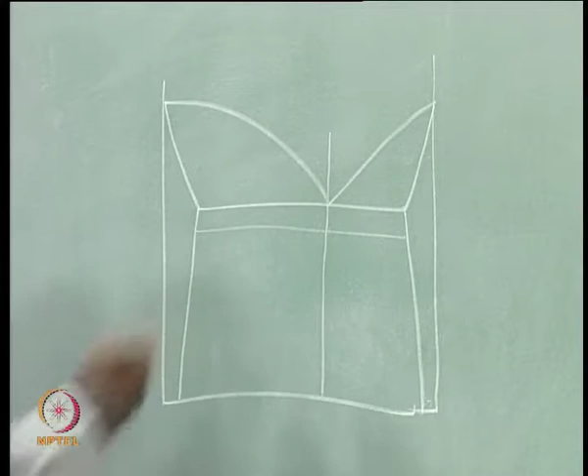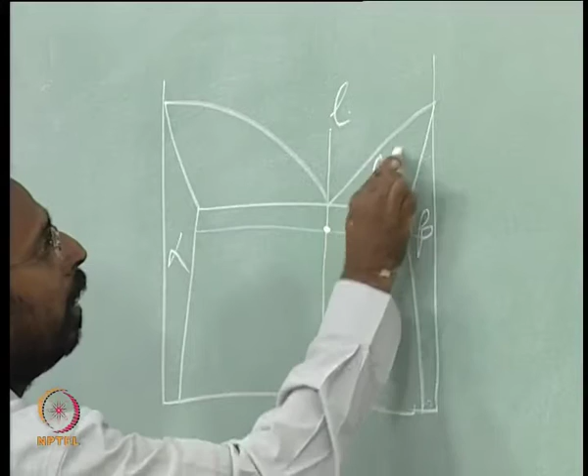For example, if you take a phase diagram like this, and you take a eutectic composition, the moment you come below the melting point, below the eutectic temperature, and hold this liquid at this temperature, what should happen? Liquid should give you alpha plus beta, and this should happen by nucleation and growth, because the liquid composition is different from the two solid compositions. So this is liquid, this is alpha, this is beta, this is liquid plus beta, this is liquid plus alpha - all this you people know.

So now if I take the liquid and bring it to a temperature T below the TE, this liquid should give you alpha plus beta, and these alpha plus beta microstructures - there are a variety of these microstructures.

The most common microstructure is what is called a lamellar microstructure. You also might have heard about what is called divorced eutectics. If possible, in today's class itself we will talk about why various types of eutectics come - that is again related to what is called surface energies, which is a part of thermodynamics. We will look at it.

But if you simply look at this alpha plus beta, which is nucleated inside a reservoir of liquid - so you have a liquid here, and this nucleus, a couple which has nucleated - alpha and beta always nucleate together if it is a lamellar eutectic. If it is not a lamellar eutectic, they will not nucleate together, which we will also see later. But assuming that they nucleate together, how do they grow?

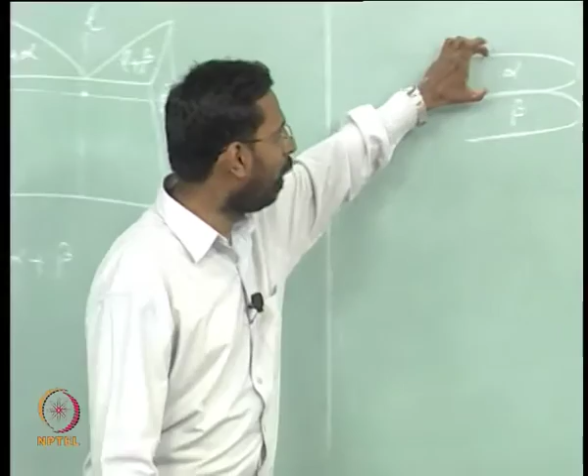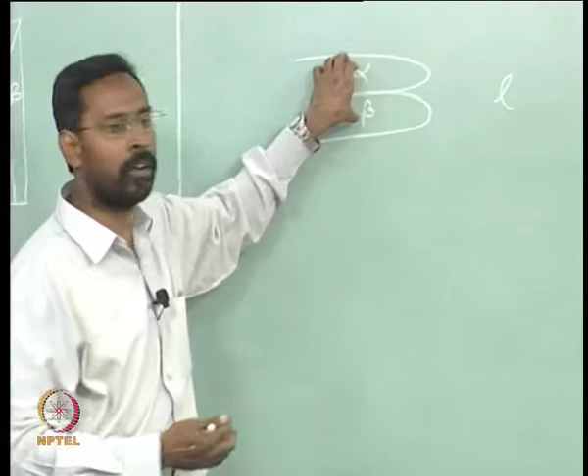If they want to grow, what you see is that alpha is an A-rich phase, beta is a B-rich phase. So an A-rich phase and a B-rich phase, both of them are growing together into the liquid. How do these two grow? They can grow only when the liquid supplies atoms to alpha and beta. Atoms are actually coming from the liquid to alpha and beta, joining them, and as a result the alpha and beta are growing together at the expense of the liquid.

So at the end of the reaction, if I do what is called the cooling curve - temperature versus time - at this particular time this has nucleated, and as it grows, by this time all the liquid should vanish and everything should become alpha plus beta. Of course there are a number of such couples that nucleate at various positions, a number of nuclei, and all of them grow together such that they form what are called certain boundaries.

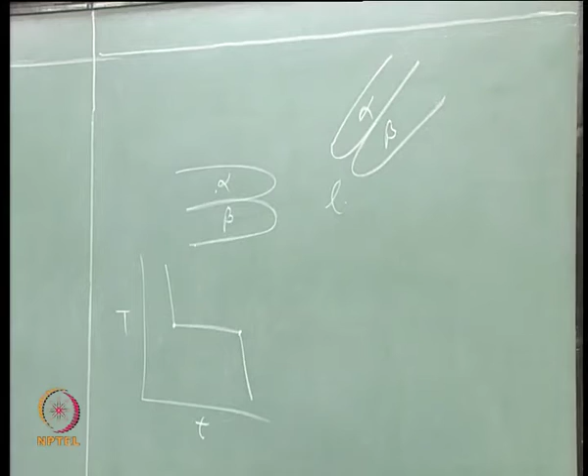What do we call those boundaries? They are not grain boundaries. In a eutectic you do not call them grain boundaries, because a grain boundary is related to one single phase, and there is no single phase here. So what do you call it when the eutectic nucleates here and something else nucleates somewhere else - alpha plus beta, both of them come together and meet each other - what do you call that boundary? Of course, it is an interface. Even this is also an interface.

So there is a name - this is called a eutectic colony, and what you get are called colony boundaries, eutectic colony boundaries. So you have a number of such eutectic colonies growing, and you will have eutectic colony boundaries coming in like grain boundaries. They are analogous to grain boundaries, and you would see in most such eutectic microstructures, boundaries of different alpha-beta growing in different orientations.

Between each colony, the difference is the orientation of the alpha-beta couple. So the alpha-beta couple orientation in this colony and that colony is going to be different. It's similar to a grain boundary, where grain orientations differ at the boundary. But let's forget about that for now.

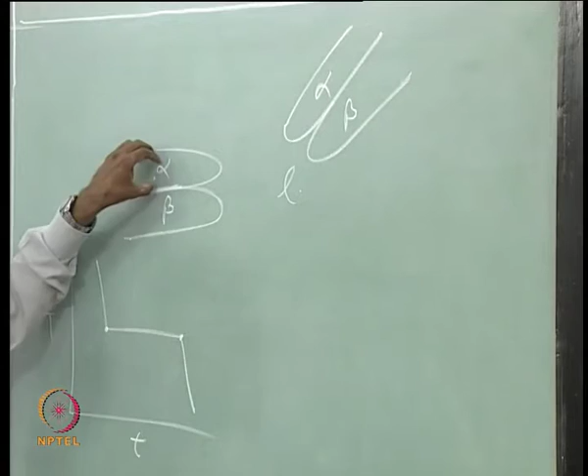Basically, alpha and beta grow at the expense of the liquid. That means for alpha and beta to grow together, the liquid needs to supply more A atoms to alpha and more B atoms to beta. This is a very tricky problem. How is it that the liquid in front is selectively able to supply more A atoms to alpha and more B atoms to beta, such that they grow together?

It is one single liquid. One single liquid is able to supply more A atoms to alpha and more B atoms to beta. Unless you do that—if only certain atoms, let's say A atoms, are coming uniformly to both—only alpha will grow, beta will not grow, and then it will not be a coupled growth. So for coupled growth to happen, selective supply of atoms to alpha and beta should take place. And how does this happen? It happens if you understand the thermodynamics a little bit.

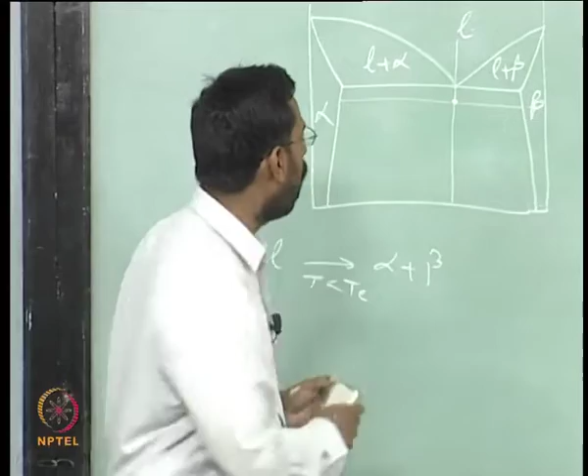Let's try to see what happens when we draw a free energy composition diagram at a temperature like this. I have taken a liquid of eutectic composition and brought it to this particular temperature. At that temperature, this whole thing is happening, and I am trying to look at what is happening. So if I draw the free energy composition diagram at that temperature, how will it look?

What is stable at that temperature? Alpha plus beta. That means the alpha and beta free energy curves should be below that of the liquid. By now this should be clear to you. So if that is the case, I can easily draw a liquid curve, an alpha curve, and a beta curve, and draw a common tangent between them. So this is the alpha curve, this is the beta curve, this is the liquid curve, clear?

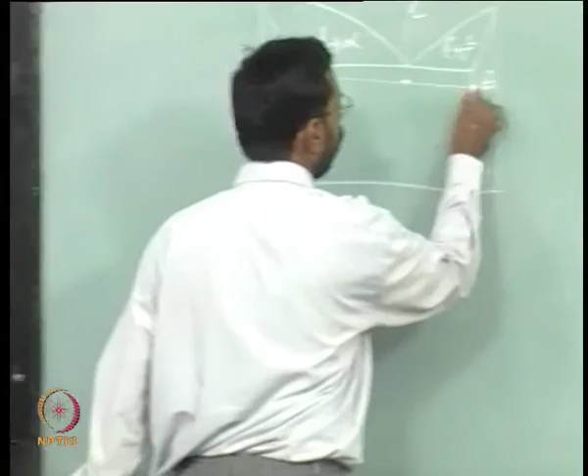These two compositions where you have the common tangent of alpha and beta should correspond to these two compositions in our phase diagram, am I right? Because there has to be a one-to-one correspondence between the free energy composition diagram and the phase diagram. This is the G-X diagram, the free energy composition diagram.

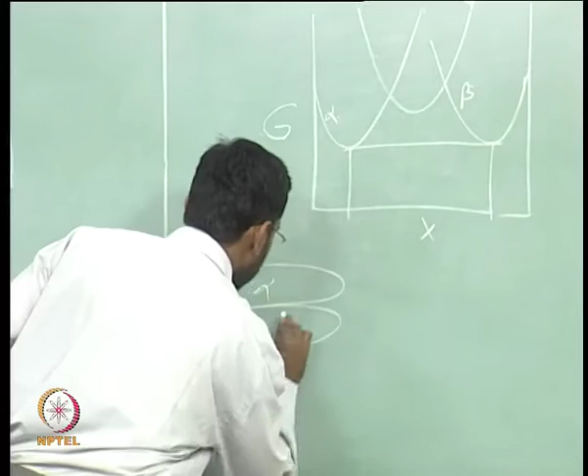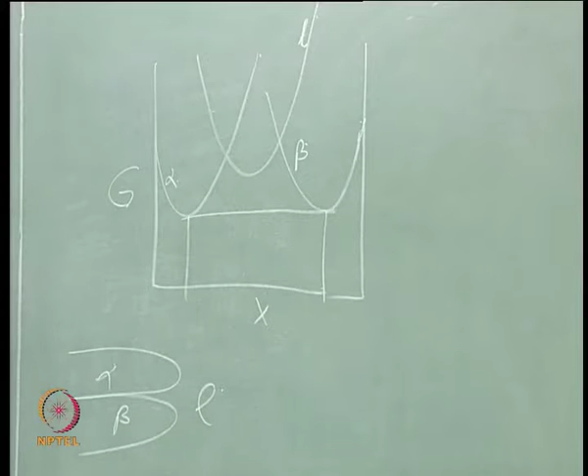Now if I look again at our couple—alpha and beta—you have liquid here. So this alpha is in equilibrium with liquid, and this beta is also in equilibrium with liquid. Now let's look at what in this free energy composition diagram represents the equilibrium between alpha and liquid, and between beta and liquid. Whenever I say equilibrium, it is represented by what? In a diagram, it's a common tangent. So when I say equilibrium between alpha and liquid, I should draw a common tangent between alpha and liquid.

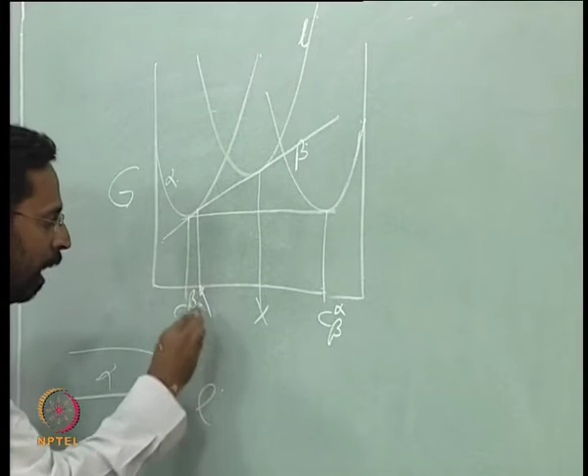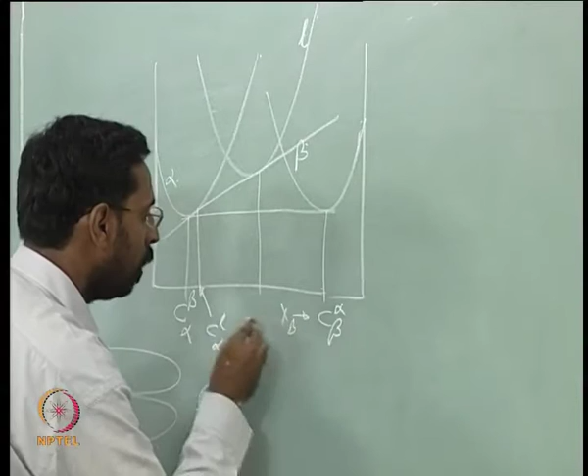So how do I draw a common tangent between alpha and liquid? Something like this. So you have this composition and this composition—let's first give notation for the first two compositions we already drew. What is this? This is the composition of alpha in equilibrium with beta. This is the composition of beta in equilibrium with alpha. And what is this composition now? This is C alpha-liquid, and this is C liquid-alpha.

Now let's do the same thing for beta. If I do this, we get two more compositions—so in total we get six compositions now. This composition, if I put it, is C liquid-beta, and if I identify this composition, this is C beta-liquid.

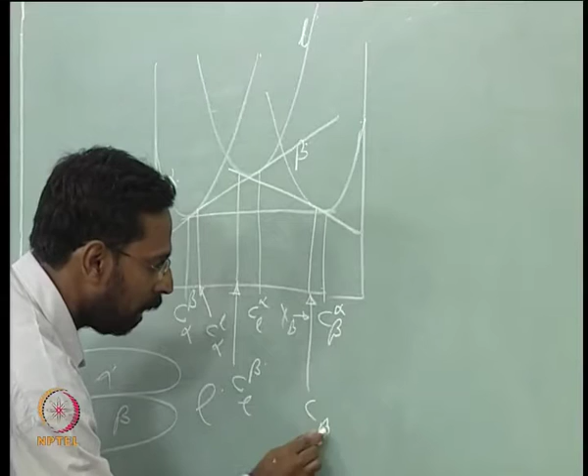What am I getting out of all this? Just simply six compositions, but if I carefully observe these six compositions—forgetting about the first two between alpha and beta—look at these four compositions. If I compare the composition of liquid in equilibrium with alpha and the composition of liquid in equilibrium with beta, I get some information. What is the composition of liquid in equilibrium with alpha?

It is this. This is the composition of liquid in equilibrium with alpha. This is the composition of liquid in equilibrium with beta. What does that tell you? That tells you the liquid in equilibrium with alpha has a higher B content compared to the liquid in equilibrium with beta. That means the liquid just in front of the alpha and the liquid just in front of the beta, if I look at the compositions of those two liquids, they are not the same.

Not only are they not the same, but the common tangent construction itself makes it such that the composition of liquid in equilibrium with alpha has more B content than the composition of liquid in equilibrium with beta. This quantity is higher than that quantity in terms of percentage B. That means just in front of alpha you have more B atoms, and in front of beta you have more A atoms.

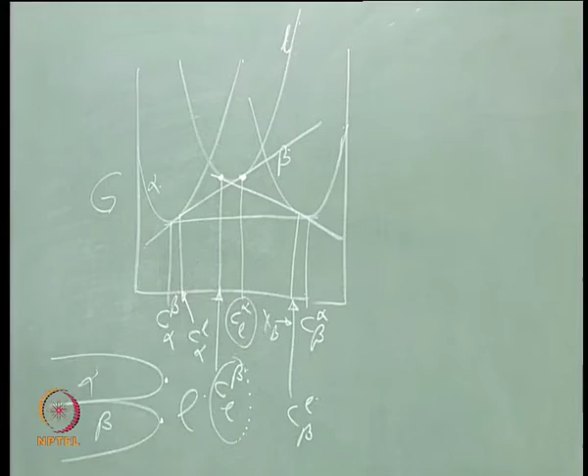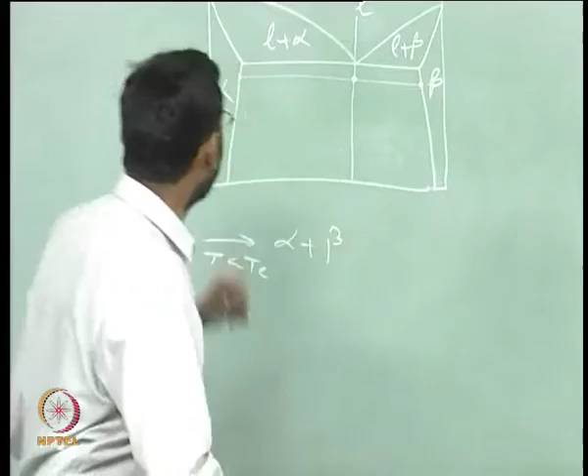This means that liquid is not having the same composition everywhere. If I go far away from this alpha-beta interface, what is the composition of the liquid? It is same as that of the eutectic composition. It is only because of the local equilibrium that has to be maintained for this alpha, and if this composition is not maintained, then alpha and beta cannot exist in equilibrium with liquid. They will possibly dissolve back into the liquid.

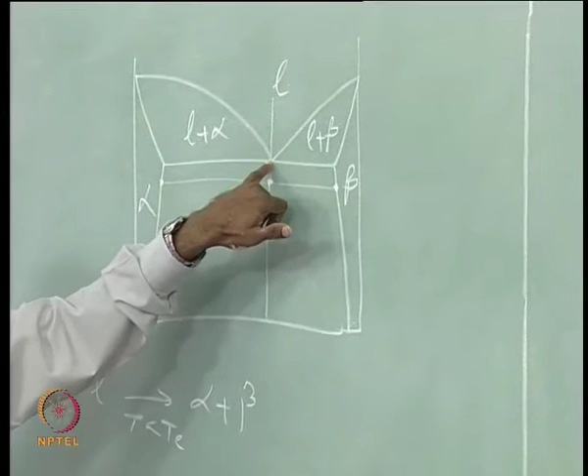If alpha and beta have to exist with the liquid, the only way that is possible at this temperature we are talking about. Remember, if I am talking of at this temperature, the situation would be different—at the eutectic temperature it is the same because it is a common tangent between all three. But we are talking of a temperature below the eutectic. I have brought the liquid below the eutectic and now looking at what would happen.

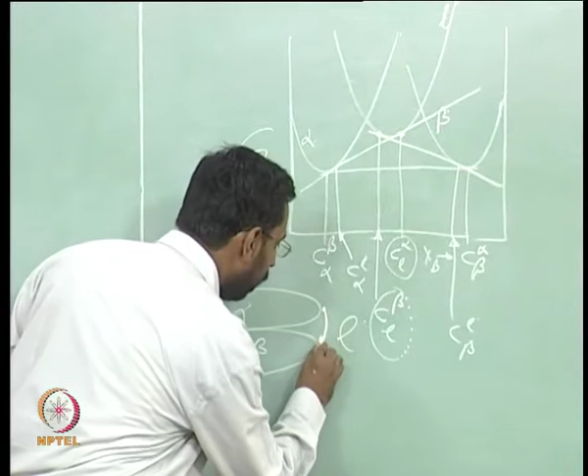If I am looking at that, you would see because of this, here at this position you have more B atoms than this. Then what you see is that B atoms will start travelling in this direction and A atoms will start travelling in this direction.

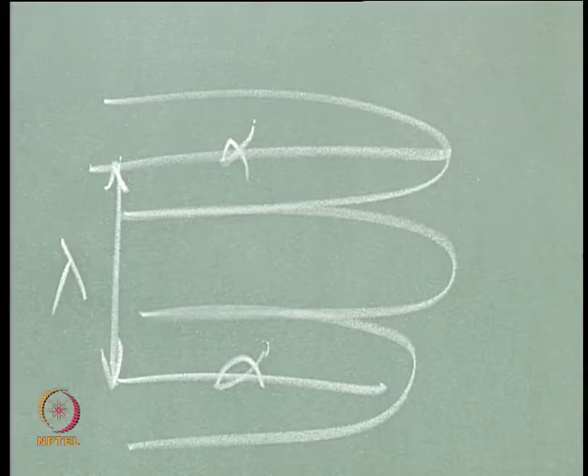And the gradient is decided by what is called the interlamellar distance. This distance between half of the alpha and half of the beta—between the center of the alpha lamellae and the center of the beta lamellae—is related to the interlamellar distance in a eutectic. So when I say if I have an alpha here, beta here, another alpha here, this to this is the interlamellar distance, lambda. So basically this is lambda by 2 we are talking about.

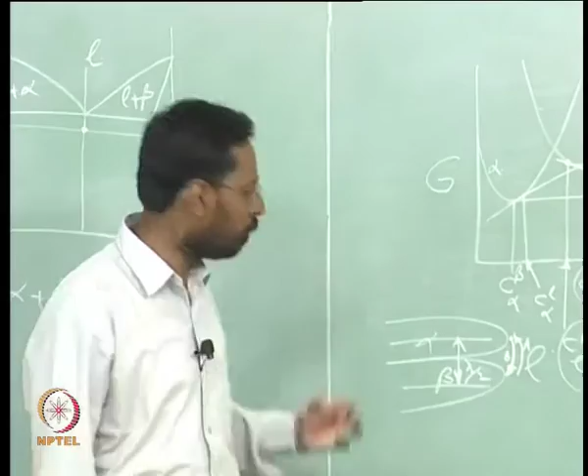This movement of atoms—B atoms going towards the beta and A atoms going towards the alpha—will make sure that the alpha gets more A atoms and the beta gets more B atoms, so that both of them grow together. And this is driven by the difference between the composition of this and this, which is what we call delta C, which is nothing but C liquid alpha minus C liquid beta.

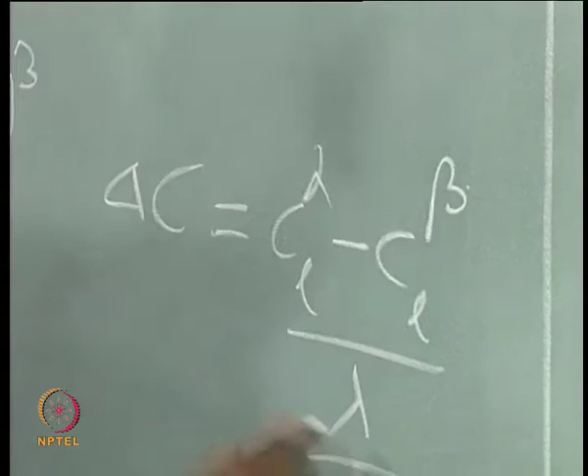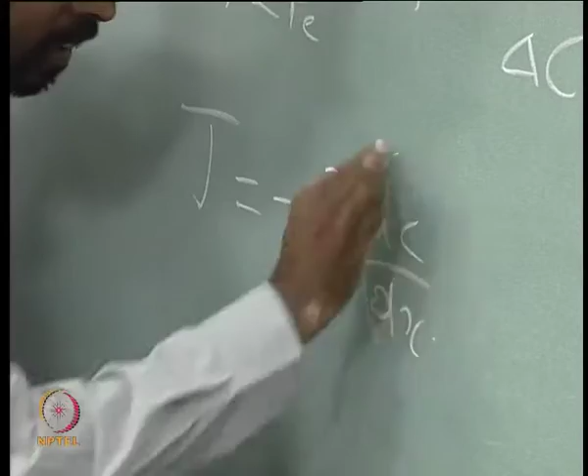This, and the concentration gradient, can be written as delta C divided by lambda by 2. This is the actual concentration gradient, and if you say diffusion flux J is minus D times dC by dx, the dC by dx for the flow of atoms comes from here. Once the nucleation has taken place, the growth is decided only by diffusion, and diffusion needs a gradient. If there is no gradient, if the gradient is zero, there is no diffusion. So this gradient is provided by this.

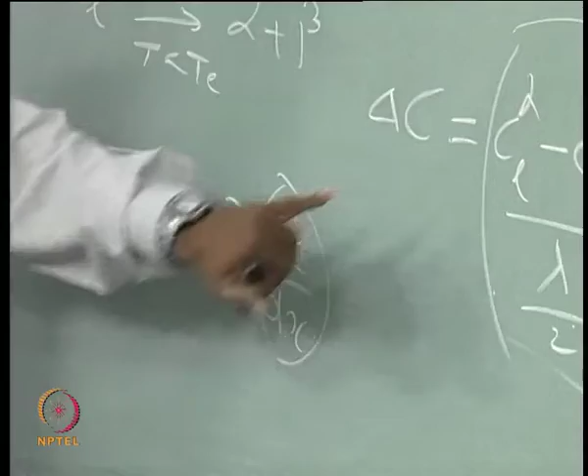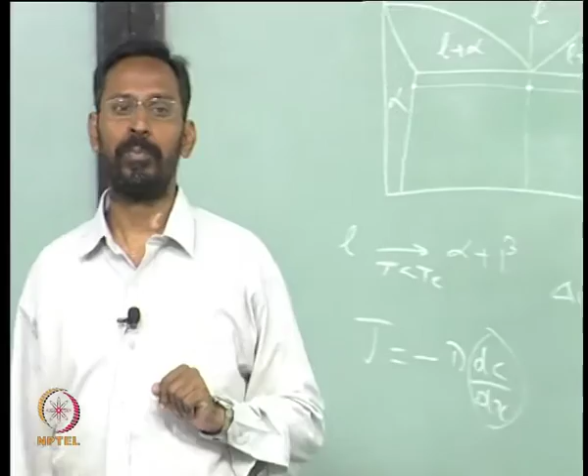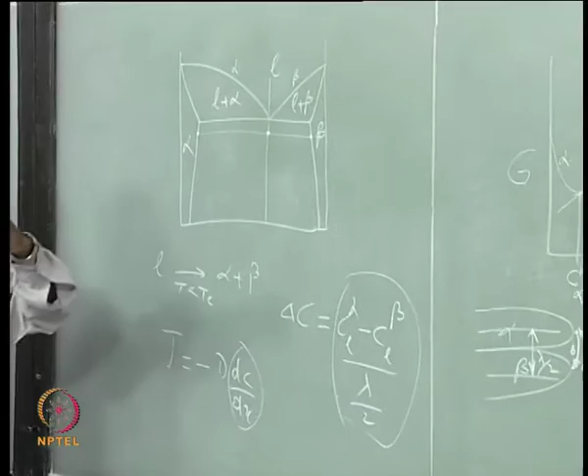And how do I see this in the phase diagram? Can I see these two points in the phase diagram? Now C liquid alpha and C liquid beta, where are they in the phase diagram? You have two liquidus lines here, one is called the alpha liquidus, another is called the beta liquidus. The alpha liquidus tells you at all temperatures what is the composition of liquid in equilibrium with alpha, and the beta liquidus tells you the composition of liquid in equilibrium with beta at various temperatures.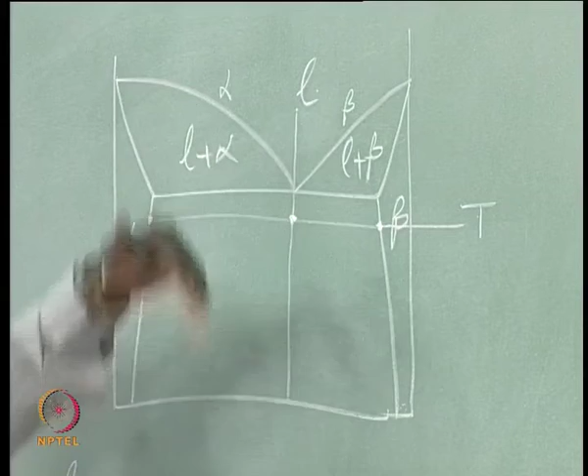So I want to know at this temperature T, what is that composition of liquid in equilibrium with alpha and liquid in equilibrium with beta. The only way I can find out is by extrapolating the two liquidus lines. So if I extrapolate the two liquidus, I get this, and this composition is nothing but Cl alpha. This is nothing but Cl beta.

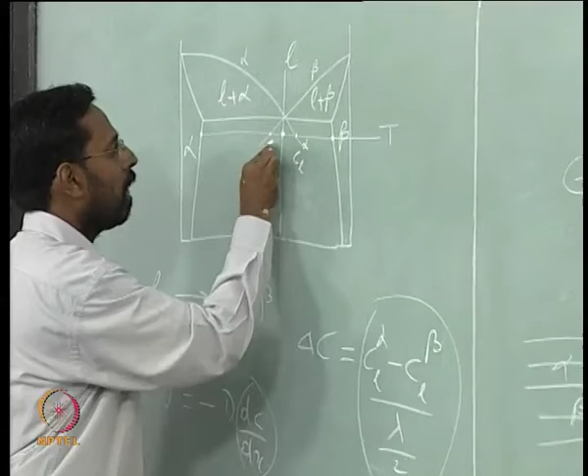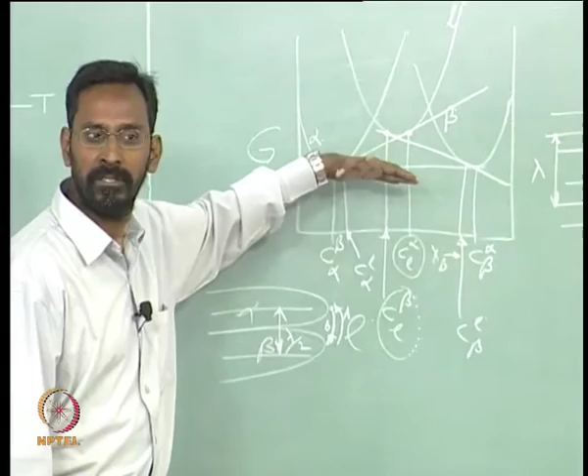The difference between these 2 is actually the driving force for the growth of eutectic. If you want the eutectic to grow, that is the reason why, if you carefully observe, at the eutectic temperature this difference is 0. Cl alpha is equal to Cl beta, because at the eutectic it is actually a common tangent, isn't it? If you remember, I can draw it for you once again.

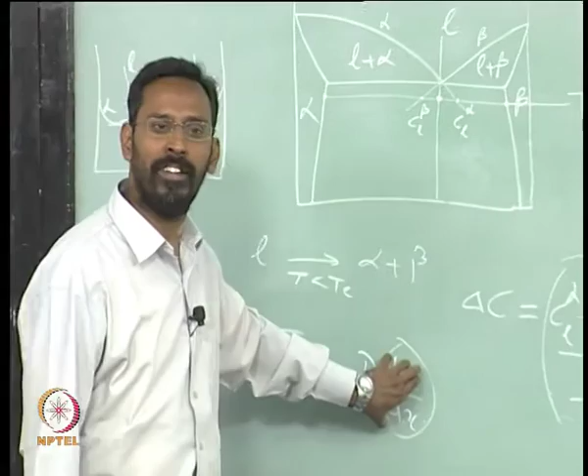So this is alpha, this is liquid, this is alpha, and this is beta, let us say liquid alpha beta. If I am trying to look at what is the composition of liquid in equilibrium with alpha, and what is the composition of liquid in equilibrium with beta, they are the same at the eutectic. Once they are the same, this delta C is 0, and if delta C is 0, the gradient is 0.

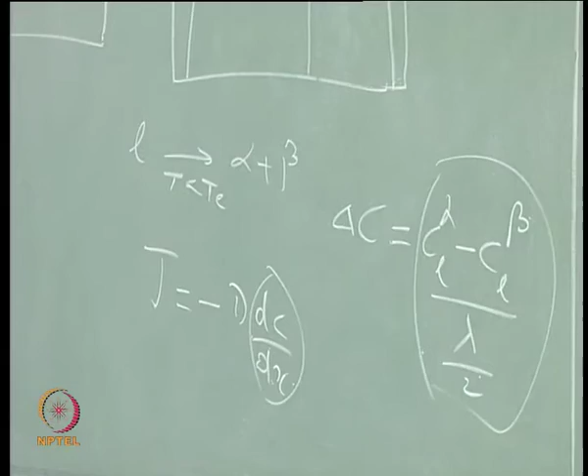If the gradient is 0, the flux is 0. So in principle, at the eutectic you cannot have growth, you need a small undercooling, at least a small undercooling. It can be very small if there is heterogeneous nucleation available, otherwise it can be slightly large, but you need a small undercooling so that you have a driving force.

And that is why you can again see that if I extrapolate this to lower temperatures, the lower the temperature, the larger the delta C, am I right? And that means the larger the gradient, and as a result, in principle, you can see the growth rate has to be higher. But there is a catch here. What is the catch?

The catch is the D there, the catch is the D. So we are forgetting that there is a D there also, and this D incidentally, if you carefully look at these 2 curves...

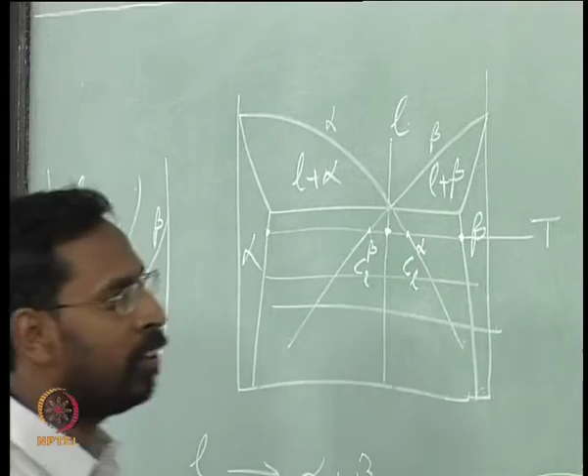If I assume that these are linear, then I can assume that the delta C is linearly dependent on the temperature, isn't it? Because this difference can linearly increase with temperature if these 2 are linear. If these 2 are straight lines, not curved lines, then you will see if I plot delta C versus delta T, delta T is undercooling, I will see that this will be linear, and at delta T being 0, delta C has to be 0.

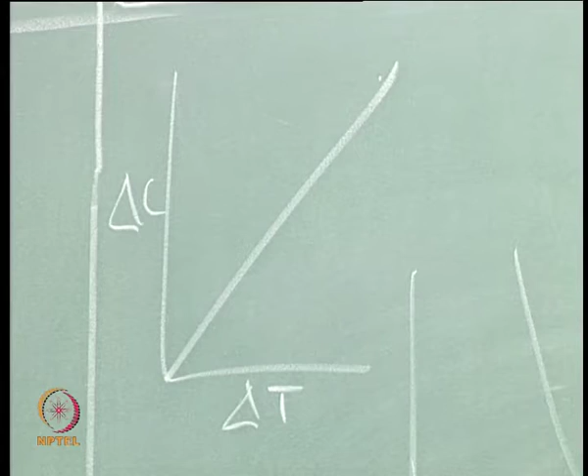Now, if I find out the D as a function of undercooling, if I look at the D, how does it change? How does the diffusivity change with temperature? It decreases, of course. In what fashion?

Exponential. Be confident whatever you want to say, you are an IITian. Tell me, how does diffusivity change with temperature? That is what we are questioning. All of you have read from your BTech level at various stages how diffusivity changes with temperature. There is a particular expression which we always use, what is that expression called?

It is an Arrhenius equation. Okay, fine. So this tells you that D is exponentially related to T. You can see that D is D naught exponential minus Q by RT.

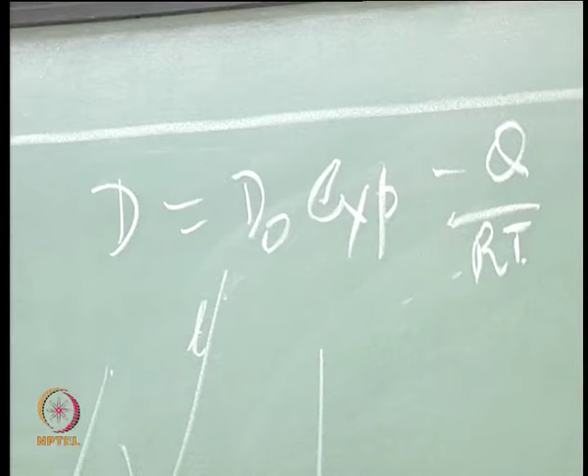So you will see that the actual, if I plot D on the same plot, you would see D would decrease. I have actually drawn it parabolic, but it is not actually parabolic, it is exponential. So it decreases very rapidly as you increase the delta T, or decrease the temperature. Increasing delta T basically means decreasing the temperature, so our delta T is increasing in this direction. So that means there is a particular critical temperature, beyond which you will see the diffusivity plays a major role.

So, that is where you will see - in fact we are not really talking about kinetics here, otherwise I could even talk about the whole growth rate and how it changes. In fact, lambda itself changes as a function of temperature. You cannot have the same lambda at different temperatures. All these things, when you study any kinetics course, you will know more about it.

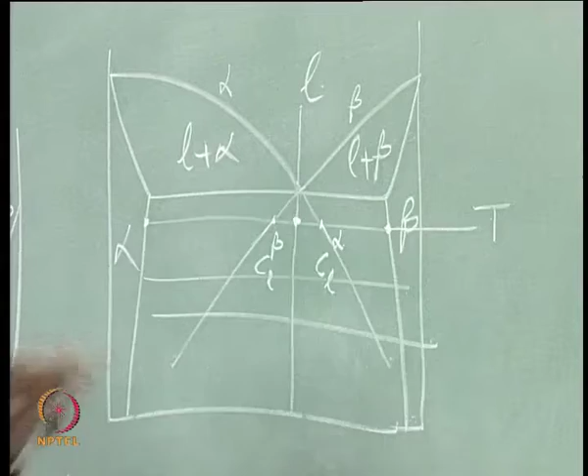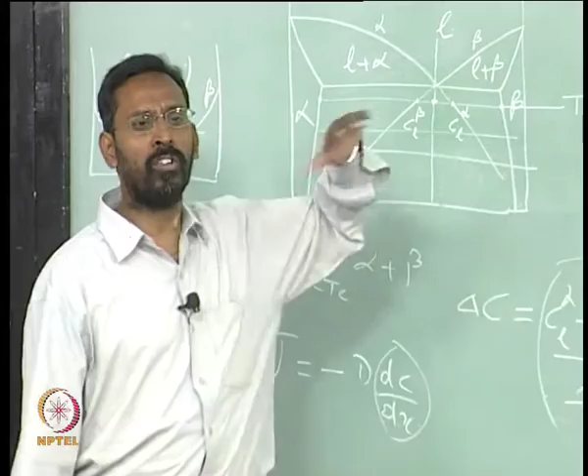So, you can see until a certain temperature, growth rate is always proportional to the undercooling, because the undercooling decides the delta C, and the delta C decides the dC by dx. As a result, at temperatures closer to the eutectic temperature, the growth rate is always decided by the delta T undercooling. So, the higher the undercooling, the better.

That is the reason why for any eutectic mixture, if I pour the liquid metal into a metallic mold or a sand mold, you would see the growth rates are different. In fact, not only growth rates, the lambda is also different - you will get a finer lambda, basically because the nucleation rate is higher, so R star is smaller. So all those things become important.

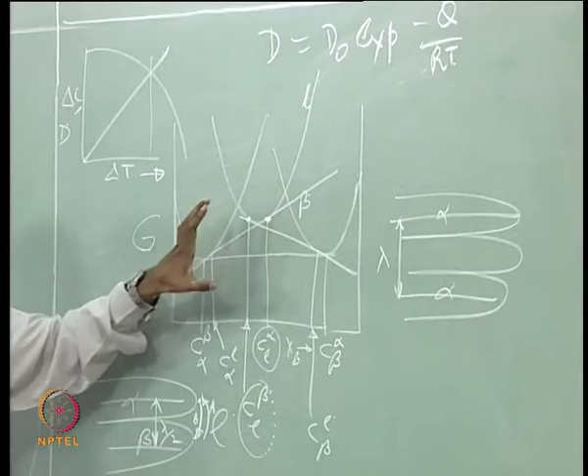So, you can see that this problem of how liquid is able to supply atoms to alpha and beta, we are able to simply understand just from this diagram. From thermodynamics very easily we can explain how this comes about. Now, let us go to the second concept.

What should be the nature of the eutectic? It does not always give you a lamellar eutectic. Can you tell me what is the type of eutectic in a steel, in a cast iron? Sorry, I should not say steels - you do not have eutectic in steels.

In fact, that is what differentiates steels and cast irons. Have you ever known what is the difference between a steel and a cast iron? When do you call an iron carbon alloy as steel? When do you call it a cast iron? Less than 2%. Why? What is so sacrosanct about this 2%?

Because I am not entering into the eutectic region. Yes, the cast irons - that name suggests they are easily castable, and easy castability is basically related to the eutectic.

So, cast irons are all those where you have a eutectic reaction, and in the phase diagram, below 2% there is no eutectic reaction, isn't it? Remember the iron carbon diagram, the iron cementite diagram - you would see that it is only beyond 2% you start seeing the eutectic reaction. That is the reason why we call beyond 2% cast iron. It is not just a magic number; it is basically decided by the phase diagram - wherever the eutectic reaction starts, we call them cast irons, below that we call them steels.

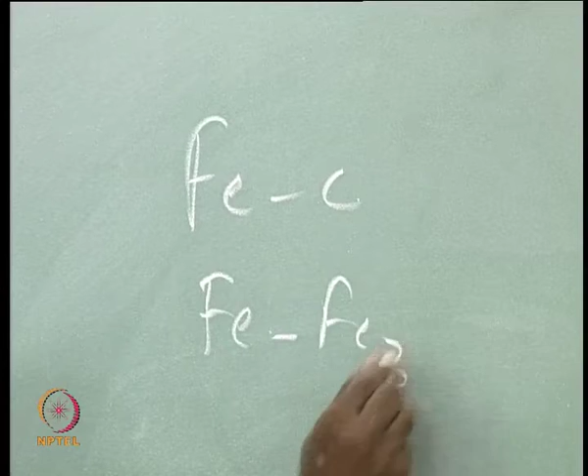So, coming back to that - this also reminds me that we should try to understand why an iron carbon diagram and an iron cementite diagram are different. Today we will try to understand that also. Before that, we will try to see there are different types of eutectics, as we said.

For example, coming back to our first question - in the iron carbon cast irons, what is the type of eutectic you have? Lamellar. You people have not seen microstructures - you have what is called a second year physical metallurgy lab, many of you BTechs should have. What is the eutectic if I take a white cast iron? White cast iron is a typical cast iron.

The other cast irons where you get graphite - that is not actually decided by the iron carbon, it is graphite which comes from the iron carbon, whereas in the iron cementite diagram, the actual eutectic reaction is liquid giving gamma plus Fe3C - that is the eutectic. Where do you see that eutectic? You see it only in white cast iron, not in any other cast iron - whether grey cast iron or nodular cast iron, you see graphite there, which is not a gamma plus cementite eutectic. Gamma plus cementite eutectic, called ledeburite, is seen only in white cast iron.

So what is the morphology of this gamma plus cementite? Is it lamellar? It is not lamellar - you have cementite networks. You have all seen microstructures of ledeburite. I am not asking about the cementite network you see when cementite is precipitated from austenite.

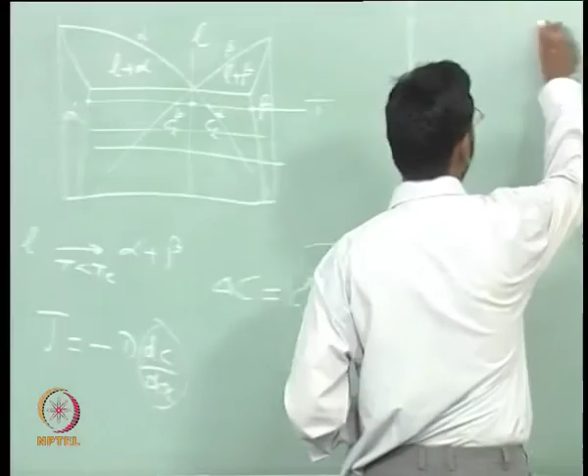Can you tell me which eutectic has actually a lamellar structure? Now, I have given two examples of non-lamellar eutectics. Give me any one example of a lamellar eutectic that you know. It is not eutectic, madam, you are talking of eutectoid, I am asking eutectic. Which eutectic is lamellar? You have never come across one? All of you are metallurgists, at least many of you, majority of you. Aluminum copper is one, lead tin is another, these are all lamellar eutectics.

If you take aluminum silicon and iron carbon, these eutectics are non-lamellar, and people call them divorced eutectics. Divorced, in the sense they are not together, the alpha and beta are not together, they are kind of separate.

Why does that happen? To understand this, we need to understand the interfacial energies. Whenever I talk about alpha, beta and liquid, I have 3 interfaces. Am I right? What are the 3 interfaces? Liquid to alpha, liquid to beta, and alpha to beta.

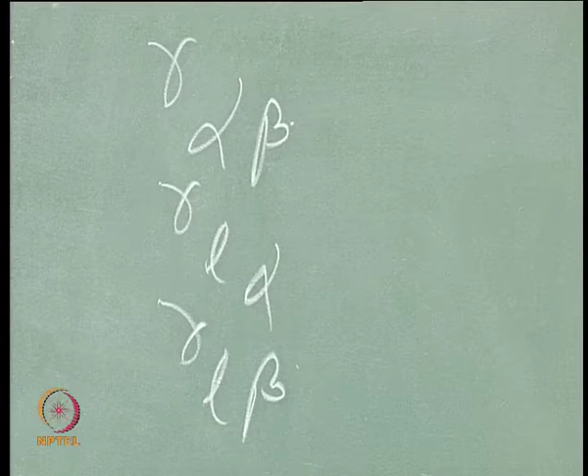So if you look at these 3 interfaces - alpha beta interface, liquid alpha interface, liquid beta interface - all of them are associated with certain interfacial energies. There is an alpha beta interfacial energy, a liquid alpha interfacial energy, and a liquid beta interfacial energy. We have already seen that whenever you talk about a liquid to solid transformation, the barrier for the transformation is always the interfacial energy.

Whenever I bring a liquid below the melting point, it wants to become a solid, because there is a driving force in terms of the volume free energy. The liquid has a higher free energy than the solid below the melting point, as a result solid wants to form, but why solid does not form is because of the interfacial energy. So whenever you have this kind of 3 interfaces, the system would choose the one which has the lowest interfacial energy.

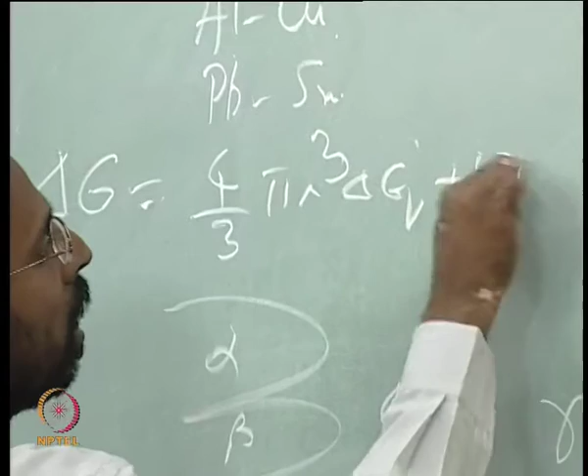If a particular system has alpha beta interfacial energy as the lowest, the system would like to have that particular interface maximized, so that the overall interfacial energy is A into gamma. This is what is actually preventing the transformation - that is why if you remember delta G, we always write 4/3 pi r cube delta GV plus 4 pi r square gamma, you remember this.

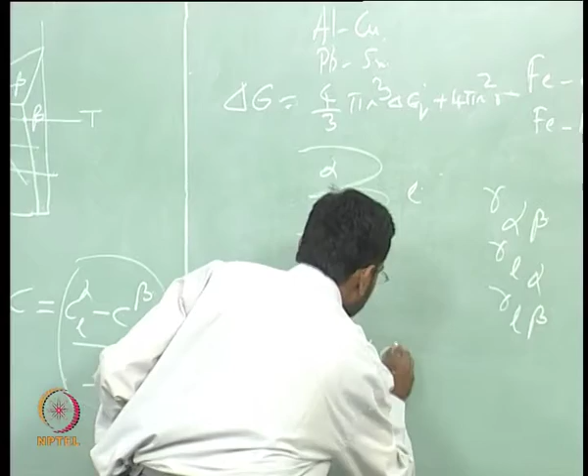Of course, there we have assumed a spherical nucleus, we are not talking about eutectics there, but if you talk about eutectics, the same thing holds good, except that these geometric factors will change. Basically I can write delta G as V into delta GV plus A into gamma, am I right? So it is this A into gamma that needs to be minimized, so that even at a smaller undercooling the liquid can become a solid.

The liquid wants to become a solid at as small an undercooling as possible. So it will choose - for example, if it is a pure metal solidifying, it has no choices of interfacial energies, there is one single solid nucleating out of that. There also it will search for any heterogeneous nucleating sites. The moment there are heterogeneous nucleating sites, the liquid is very happy, because this gamma is very small there.

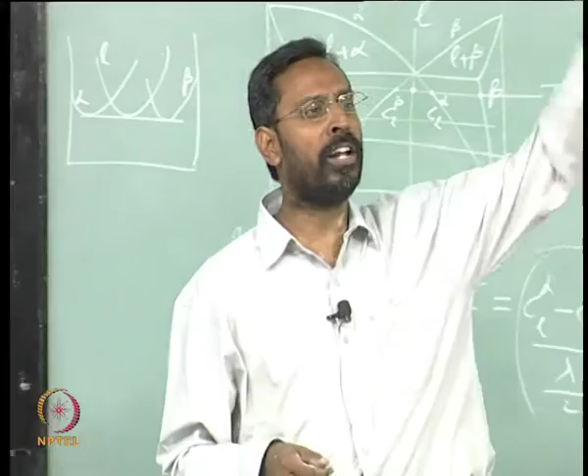Because that is the meaning of a heterogeneous nucleation site - a site where the interfacial energy between the solid that is nucleating and the particle that is available is very small, and that is the reason why you see heterogeneous nucleation occurring. If you just add any type of particle to a liquid, it does not give you heterogeneous nucleation. Simply take aluminum, add some sand particles to it, it does not give you that, though you may say there are particles available. That particle you are adding should have a structural compatibility with the solid that is nucleating, such that the interfacial energy between the solid and the particle available should be very small, so that this is minimized.

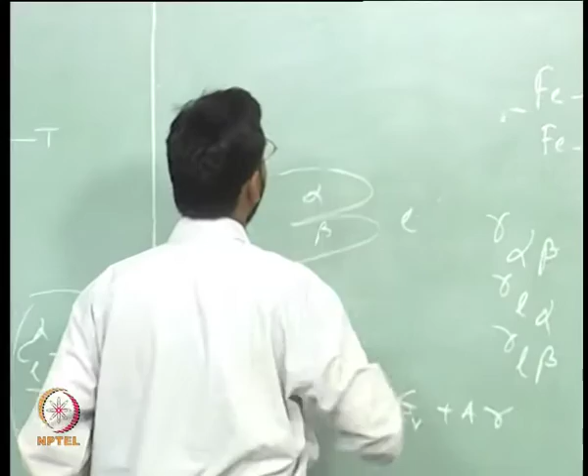Going back to heterogeneous nucleation, think of a particle here with a solid nucleating in a liquid. Before solidification has taken place, if the solid has not formed, what you have is only a particle-liquid interface. You have a particle, you have a liquid, and the solid has not formed on it, so you have a gamma PL.

Before a solid has formed on it, this gamma PL has some surface area, and that area into gamma PL will decide what is the total interfacial energy of that particular system, given there is a particle inside a liquid.

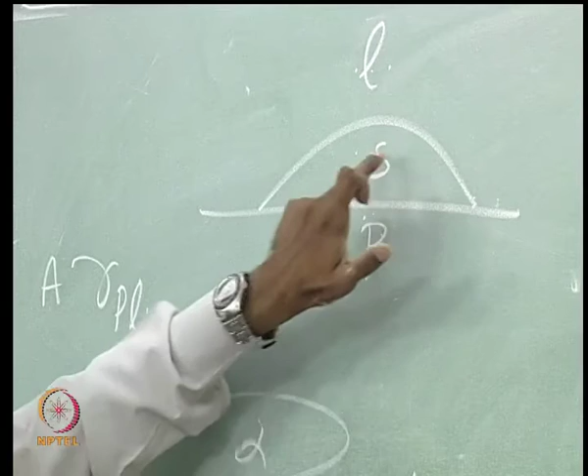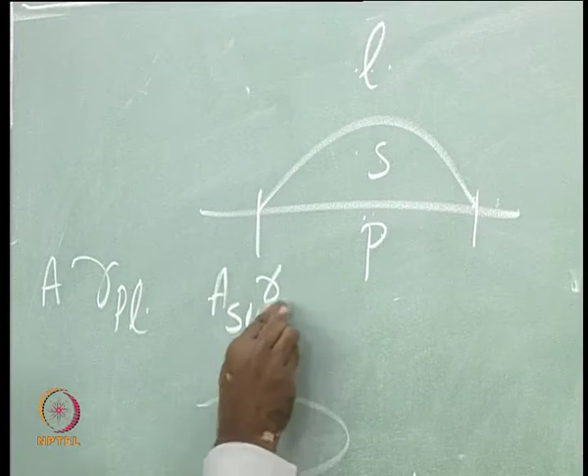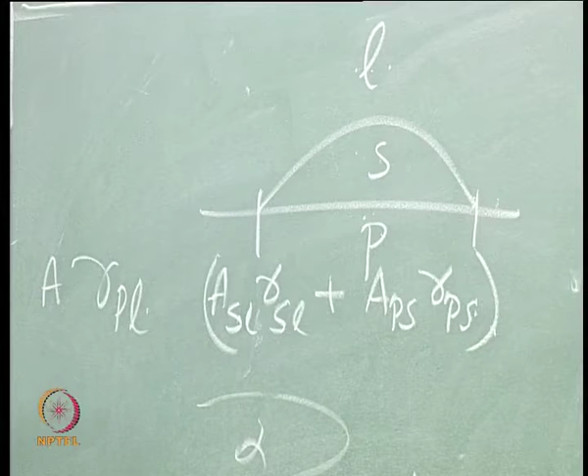Now, the moment a solid nucleates on the particle, you have different interfaces: a particle-solid interface and a solid-liquid interface. So a particle-liquid interface, which was in this area, has now been replaced with a particle-solid interface and a solid-liquid interface. So you will have A of SL into gamma of SL, plus A of PS into gamma of PS. These two are replacing A of PL into gamma of PL. If this is smaller than this...

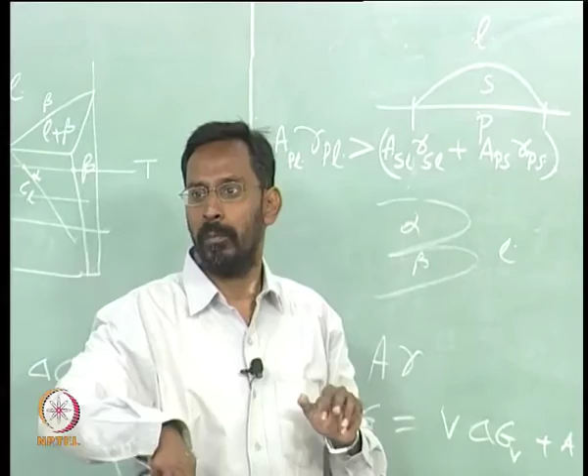If this combination is smaller, then only heterogeneous nucleation will take place, because this interface is replaced with two interfaces: a particle-liquid interface and a particle-solid interface, which is actually a circular interface, since it is a plane surface on which a hill or bubble-like solid is forming. So this interface is circular, whereas the solid-liquid interface is like a spherical cap.

Whatever the geometry, you can calculate the area of the spherical cap and multiply it with the gamma of that interface. Similarly, calculate the PS area. Actually, A of PS is equal to A of PL, because before the solid nucleated, these two surfaces were the same. It is something like a flat surface, and in a circular area a solid has nucleated and formed like a balloon, so this area, before the solid nucleated, was actually the particle-liquid interface. So I can say this is equal to this.

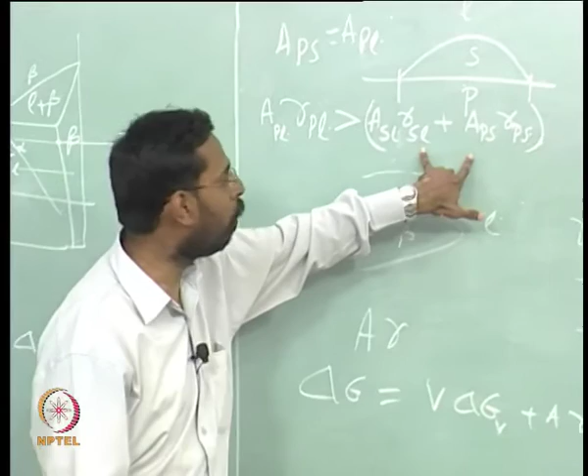So, considering these two total surface energies, the overall surface energy after nucleation has to be smaller than before, only then would you have heterogeneous nucleation. So whenever heterogeneous nucleation takes place, it happens when gamma PS is very small.

Gamma SL does not depend on what particle I am adding, since it's between liquid and solid, which has nothing to do with the particle added. But gamma PS is decided by the structural compatibility between the solid and the particle. Whenever the particle has a very similar structure, that is the reason why when I take an aluminum alloy and add a TiB2 particle, it acts as a good nucleating site. Why? Because TiB2 has a hexagonal structure, and there is some similarity between the hexagonal structure and aluminum.

What is the structure of aluminum? FCC. What is the similarity between these two? Some plane of FCC has similar packing to a plane in HCP. The basal plane of HCP and the 111 plane of FCC have exact similarity. So on the basal plane of a TiB2 particle, aluminum can grow, and that is how the nucleation actually takes place. Just because structures are compatible is not sufficient - you also have to look at the interatomic distance in the basal plane versus the 111 plane, otherwise there is strain during nucleation.

That is why we talk in terms of coherent interfaces, semi-coherent interfaces - all that comes from lattice parameter compatibility. When this mismatch is much smaller, so that compatibility is satisfied, only then do you have nucleation.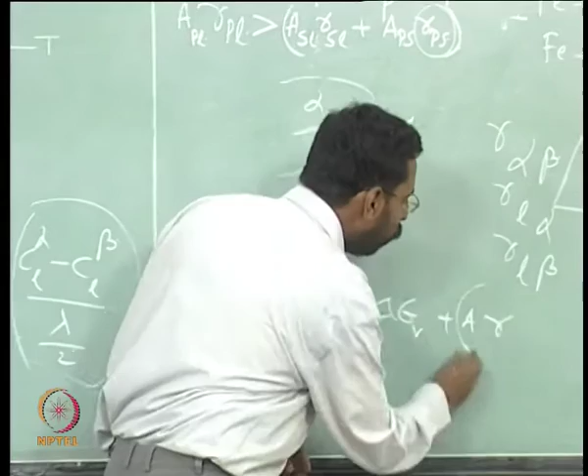Similarly, when you have these three interfaces, the interface which has the lowest energy is preferred. For example, in a eutectic, I have to split the interfacial energy term into three parts: alpha-beta interfacial energy, alpha-liquid interfacial energy, and beta-liquid interfacial energy, because all three are present together. Out of these three parts, the system chooses whichever is lowest, and that is the reason why wherever you see a lamellar eutectic, it means the alpha-beta interfacial energy is the lowest.

You can actually calculate it, or look in a handbook where interfacial energies are available, and you would see that this holds true - whenever alpha-beta interfacial energy is the smallest, you will see lamellar eutectic forming.

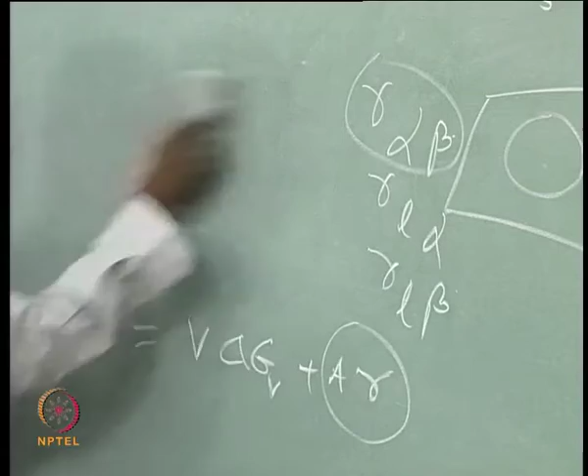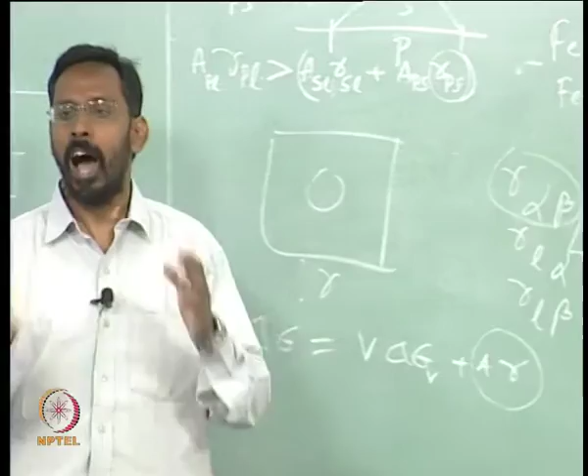If one of the other two is smaller - for example, if alpha-liquid interfacial energy is the smallest - then inside the liquid, alpha will nucleate first. The moment liquid-alpha interfacial energy is smaller, alpha and beta will never nucleate together as a couple. You will see alpha nucleating first, and then the remaining liquid slowly converts to beta, so that you end up with a beta matrix and alpha particles.

It can be alpha particles, alpha needles, or alpha plates, depending on growth conditions - certain structures depending on what the structure of alpha is.

For example, if you look at cementite, it is a particle in ledeburite, whereas in the aluminum-silicon eutectic, the silicon forms needles. Why? Because the diamond cubic structure of silicon is such that some directions can grow much faster than others. If you've read about solidification, growth directions are different because growth rates are not the same in all directions.

Have you ever heard about this? For example, if I take a cubic structure - aluminum nucleating inside - we always say it is a spherical nucleus. Actually, first and foremost, it is never spherical. A nucleus is never spherical, except in a situation where a liquid is nucleating out of a gas, because there is no crystal structure there. The moment you talk of a solid nucleating out of a liquid, or a solid nucleating out of another solid, you can never have a spherical shape, because a solid nucleus is composed of unit cells.

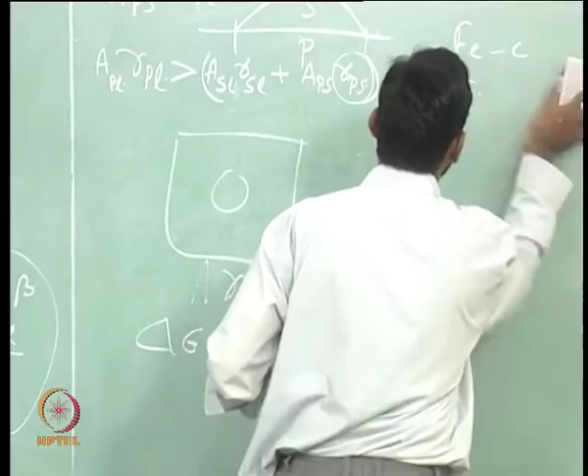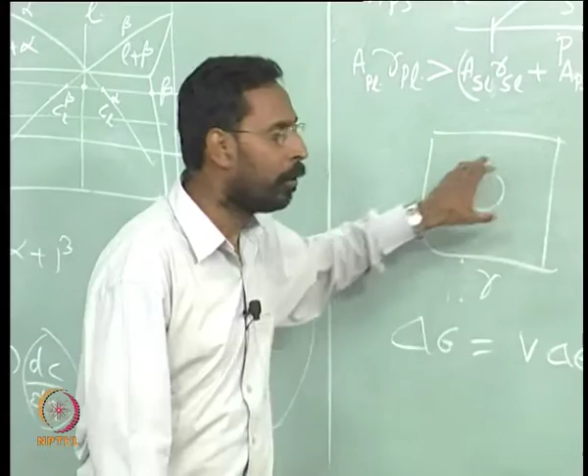Coming back to that point - you understand that it would be alpha that nucleates and grows, and then the rest will be beta. In the other case, where liquid-beta interfacial energy is lower, you will see beta nucleating and then growing. So depending on the situation, you will have different morphologies of alpha, but you will always see that there is no lamellar nature there - you will always see one phase growing inside the other.

So when the eutectic reaction is finished, when you look at the microstructure, you will see one phase embedded in the other phase. The moment you see embedding of one phase in the other, you can easily understand - for example, silicon inside aluminum, or cementite inside austenite - it clearly tells you that the cementite has nucleated first.

Similarly, silicon has nucleated before alpha aluminum. By looking at the microstructure, we can know which phase nucleated first, and that gives you an idea about whose interfacial energy is lower. But interfacial energy is not the only aspect to consider.

The second aspect that decides which phase nucleates first is structure. If one of the two phases has a very complicated structure, its nucleation becomes more difficult. So the kinetics will force one phase to nucleate first rather than the other. That is another important point.

Now coming back to the point of the shape of the nucleus, a lot of people have worked on this. You've heard of Gibbs? Of course, the whole thermodynamics and free energy concepts we talk about come from Gibbs. He worked on this for quite some time to understand the shape of the nucleus.

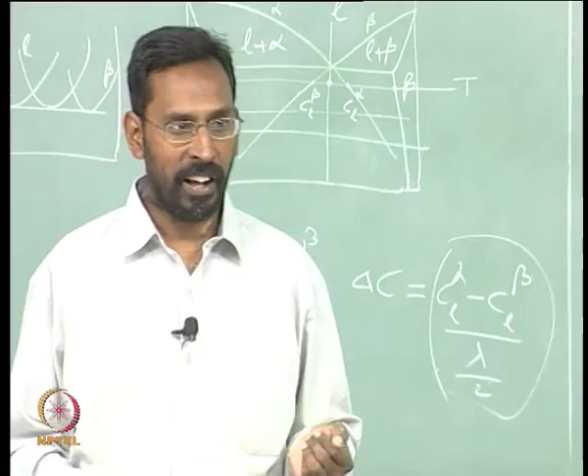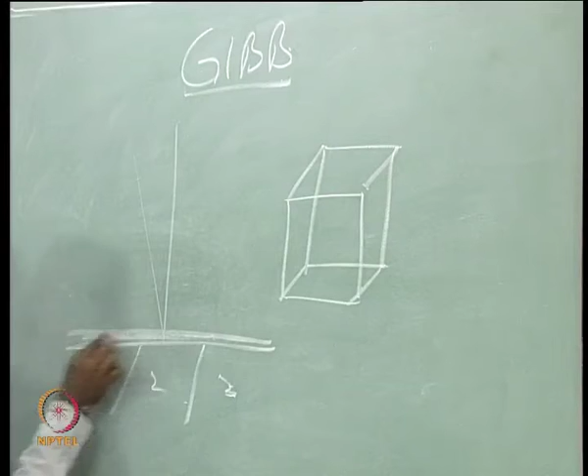If you look at a sample with different grains - grain 1, grain 2, grain 3 - light falls on it and goes back, and you see the light coming through the eyepiece. This happens only when there's an etchant present. The etchant selectively dissolves different regions - whichever regions are more reactive get dissolved more, and this reaction depends on the surface energy.

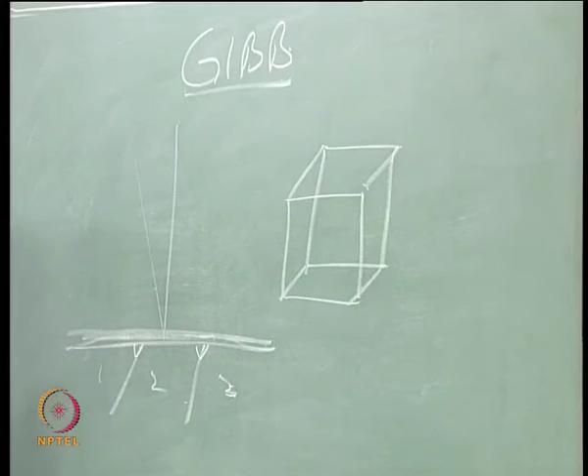That is why we start seeing grain boundaries first - because grain boundaries are high energy regions, so they get attacked first. A pit forms there at the grain boundary. Once a pit forms, light entering there does not get reflected back towards the objective, it goes out instead. Since it doesn't reach the objective, you see it as black - that's why grain boundaries look black.

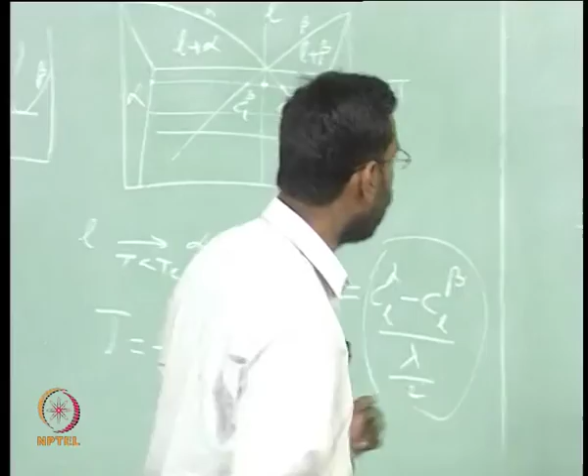Similarly, different grains also dissolve in different fashions, because the planes parallel to the surface for grain 1, grain 2, and grain 3 are not the same atomic planes. For example, in grain 1 the plane parallel to the surface may be the 111 plane, but in grain 2 it's impossible to have the same 111 plane parallel to the surface.

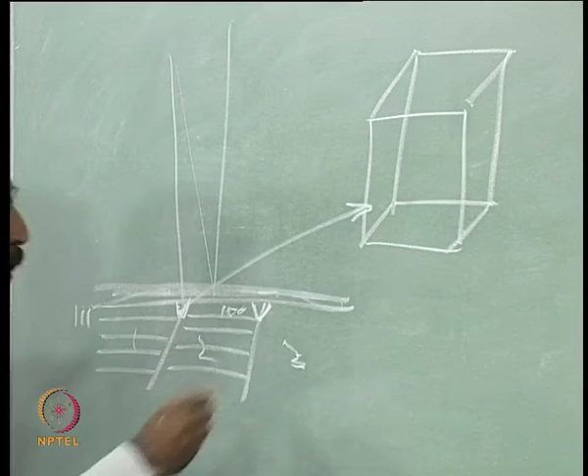Why? Because it has a different orientation. If the same 111 plane were parallel to the surface in both, I would not call it grain 2 - both would be the same grain. So you'll see some other plane parallel, maybe 100 in one grain, and 110 in another.

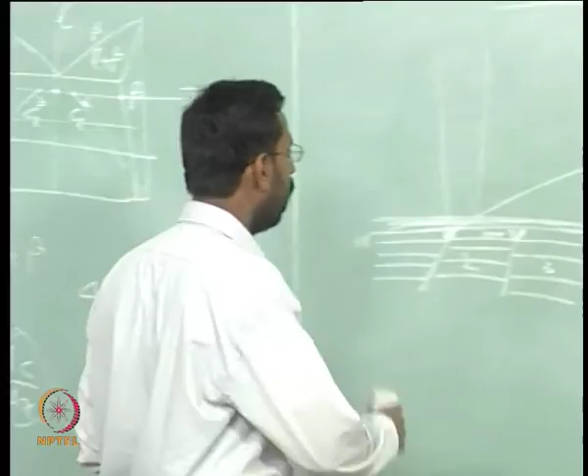Now, what Gibbs did was look at these surface energies and tried to form the shape of what is called the nucleus based on these surface energies. I think we will look at that possibly in the next class.